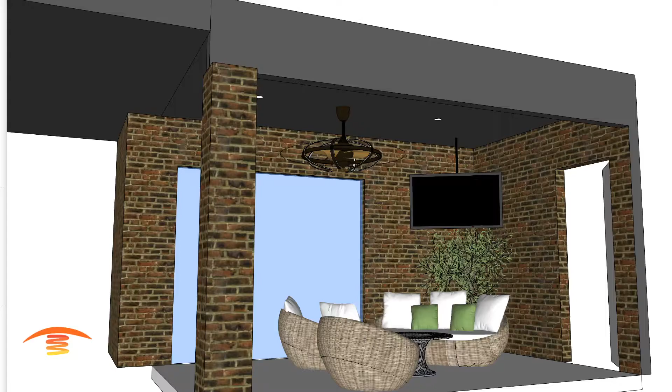Here we have a residential application. So you can see the elements in this application are, we have a fan in the middle, a couple of can lights, and a TV set off to the back corner here. The fan that I have here is just a model, obviously, and the blue circle here is the actual diameter of the customer's fan. So that's something that we need to be aware of.

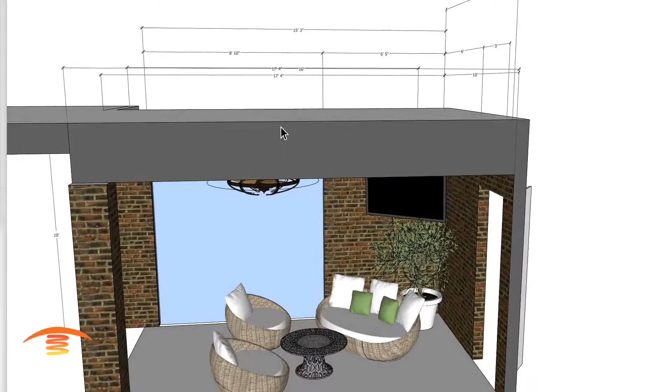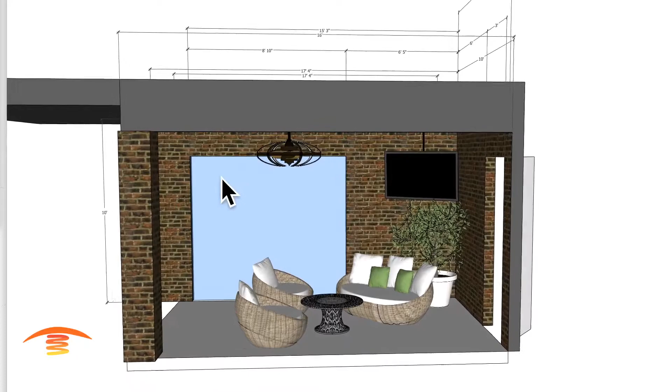So let's go ahead and look at the dimensions. Overall dimensions of the height up at the ceiling is 10 feet. To this lower beam here is 9 feet high at the bottom. And then overall length of the space I have from this outer edge to the wall here is 16 feet. And then front to back from the inner wall to this outside edge, 10 feet. You can see I have a lot of other measurements here, and that's just to get the locations for other elements. So let's go ahead and turn that off.

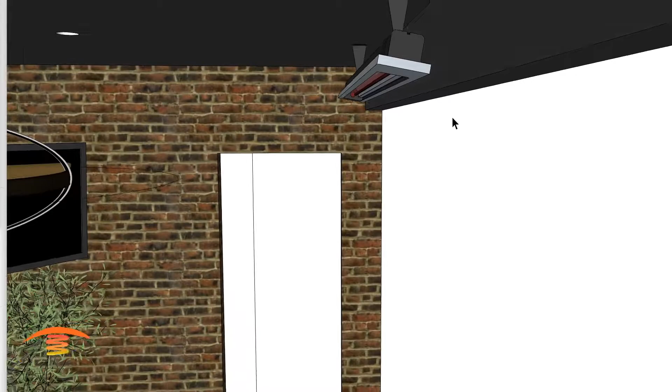So I have two different options. Option one would be to place a slimline unit inside here. The slimline unit is a 4,000 watt unit. You can see I have a clearance from this beam, and I'm expecting this beam here to be a wooden beam, so that's a combustible surface, so it's at 6 inches. I have it at the very same elevation, the bottom, as the beam itself.

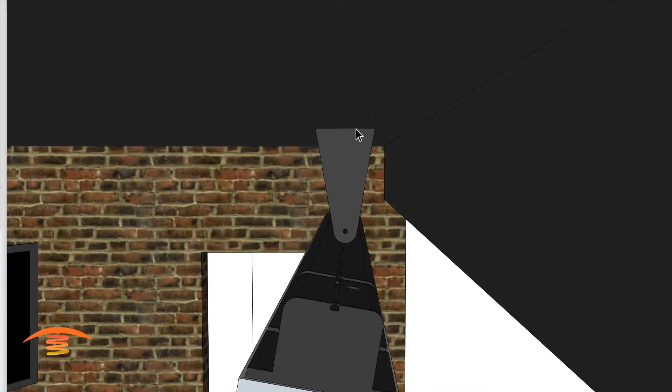You can see the standard brackets here do not fit the height here, so you'd have to get the extended bracket, which is a 4-inch extension bracket, which is one bracket, but it's just 4 inches taller than the one that comes with the heater itself. So there you have the unit. You can see with the clearances, I'm just at that clearance.

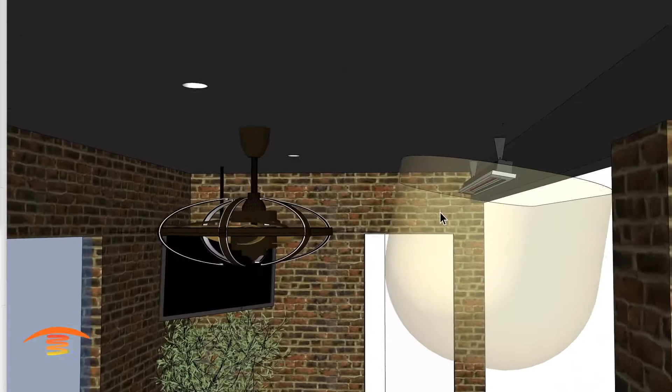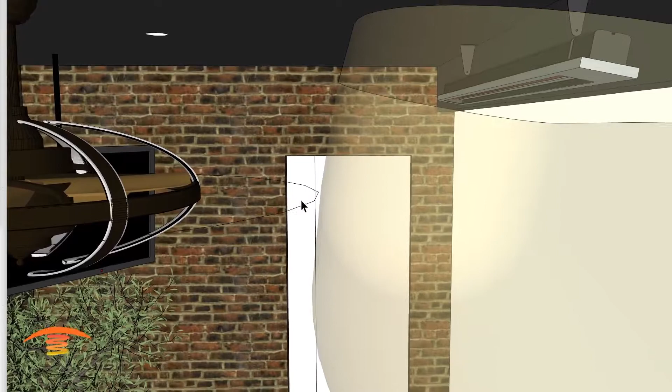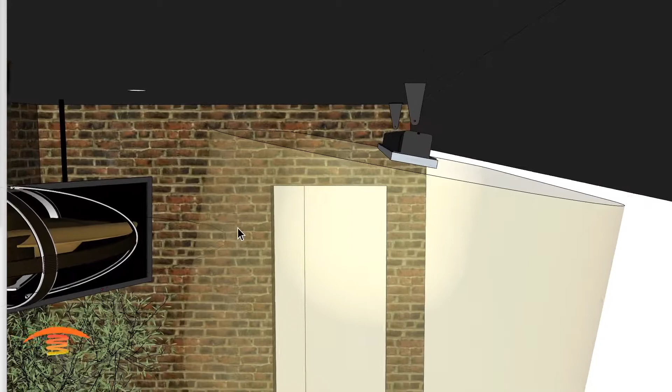That's why it's really important to get the measurement of the elements inside the room, the specifics and where they're placed. But you can see with this 15-degree tilt, I'm just meeting that clearance to the edge of the actual fan blade dimension. And also the outer edge here, if I had this straight down, I would still meet this, but I think my beam would start to come into that area there. And also I wouldn't get the throw I'm looking for as well.

Above, you can see, whoops, I don't have that angled properly, but I do have the clearance above the heater when I have it angled properly. So I'm not worried about that. And turn those off. Let's go ahead and look at the ray, the footprint of heat. So with this footprint of heat on a 4,000 watt unit, you can see I cover the space decently, but I'm not really getting the type of heat I want on this space.

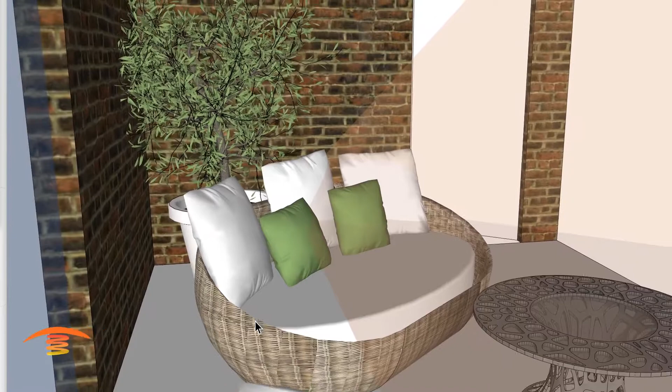This is the furthest distance that this ray will travel to the seating position over here, and I think the client actually has this chair even further towards this wall than I do. But in any case, this is the least intense part of the ray, this outside edge, and with this layout I'm not really satisfied with the amount of heat that I'm getting in these locations. Here it's going to be okay.

Here it's again at the least throw, so it's not really the greatest, and I truly discourage placing something in an application where potentially satisfaction is not going to be there. So I'm really not happy with this actual option. So let's turn that off. I'm going to go with an option 2.

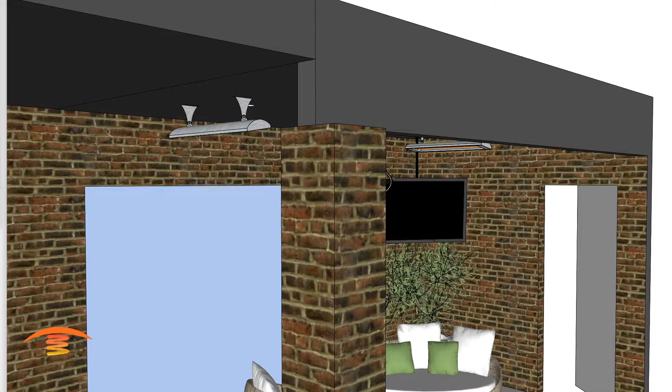Option 2 would be to have two CD 4024. So these are 4,000 watt 240 volt heaters. These are 39 inches in length. I have them basically centered within from here to here, the space, and I'm meeting the clearances, I believe. Let's go ahead and put those clearances on. Second here. There we go. Sorry about that.

So the clearances around the heater itself, I'm not penetrating the TV set here, as you can see. It's just outside the array or the clearance, and there's a difference between the clearance here and the TV set and the array itself. So this is the clearances, the combustible materials that you need to maintain, but the actual array itself isn't going to be penetrating the TV set, and that's an important aspect.

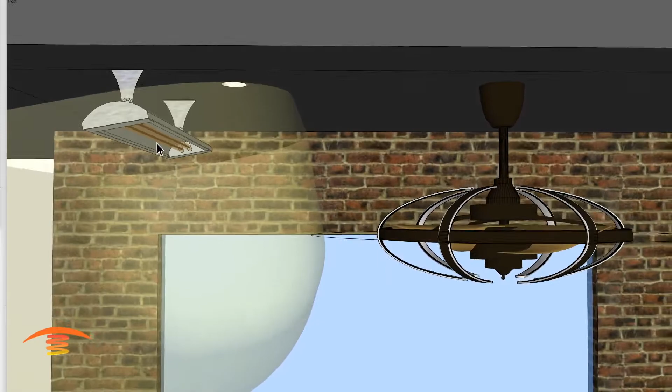You can see here that 60-inch edge is just barely tapping here. I think these are at like a 15-degree tilt inwards, so that'll give me a better coverage, that 15-degree tilt. I do have this heater attached to the ceiling, and let's go ahead and look at the clearance above. Turn these off for a second so you can see the clearance above is not an issue whatsoever.

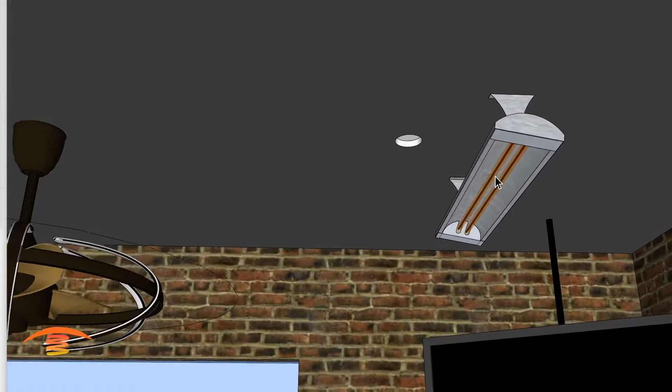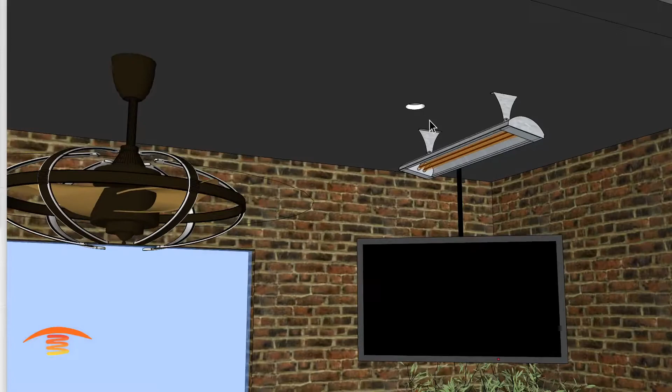And then of course these can lights here, now the clearance, you're not going to see the yellow clearance model that I have there, but you can see that the can lights should be okay. I don't think you're going to get much reflection off of the light itself. I'm not sure how far the ray of the light travels this distance here. There might be a little bit of shadowing over here from the heater itself, but I really need to get these heaters as close to each other as I can with what I have here inside these elements here.

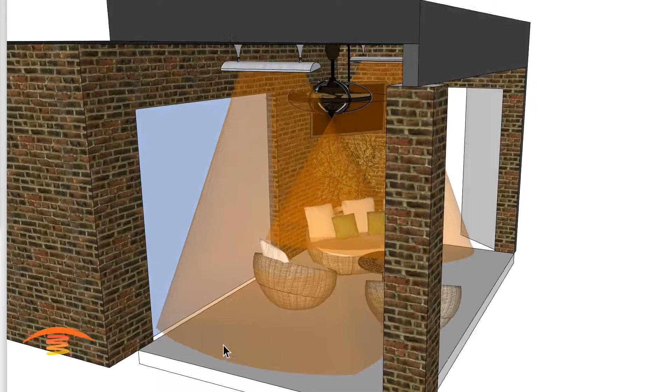Let's go ahead and look at the footprint of heat. Now these are the CD-4024s, and so their footprint is going to be a little bit shallow in this direction, but you can see that I have pretty good coverage. I am getting some overlapping here, which I really want. I wish I could put this heater a little bit closer to the seating position.

You could go with a CD 5024, so it's a 5,000 watt unit on each of these, and get a little bit more intensity so you can carry out that ray a little bit further, maybe another foot for its ideal. And the bottom edge of this is the ideal footprint of heat that we look for when we're laying something like this out. But you can see I'm really covering this space rather nicely.

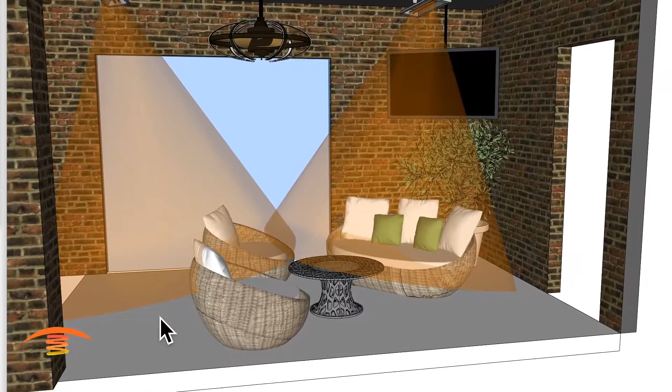So, you know, on colder days you might choose to select these chairs and push them back and really be in there while you're watching your TV. And this one would get really good coverage here. And then I'm actually placing these heaters where I choose to, so the client might actually have these further this way already. I'm just kind of laying that out.